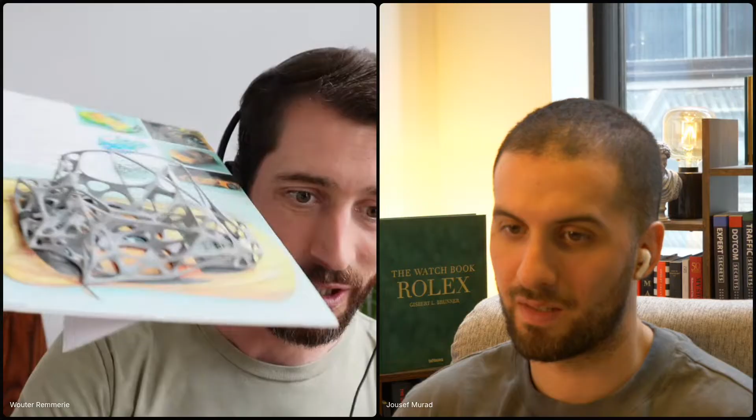And then I played around with some manual design of a framework that I would then 3D print for the chassis. And I didn't know how to run aerodynamic simulations, so I contacted a design agency here in Belgium where I live, and I asked them, "Can you run a simulation for me?" They said, "Yeah, we can, but that will cost you 3,000 euros for one single simulation, which is a market conform rate, but it's a lot, especially for a hobby." So I said, "No, thanks."

But then I quit my job, went traveling for a few months, and when I came back, I actually needed a job, and I just applied at that engineering agency that made me the offer. And then we started working on this concept, and I also started working on customer projects, which was really cool. Did that for 6 years, CFD simulations, wind tunnel testing, NASCAR, IndyCar, drones, and so on. After I had done 5 years before on structural simulations.

And then after 11 years of doing simulations, I thought, well, this is actually prohibitively expensive and difficult for customers to get into this. So instead of using the traditional approach, which is to use a license, which is 50 to 100,000 euros, expensive hardware, an expensive person to operate the software, we wanted to flip things around with AirShaper and just say, well, just pay per simulation or pay for a number of simulations without the investment in knowledge, hardware, software, and so on. And that's how AirShaper came to be.

Yeah, that's super exciting. Wouter, I think if you want, you can show us a little bit about the topic of shape morphing and shape optimization, and then we can delve straight into the software, I'd say. Yeah, happy to. I'll share my screen here. Just a sec. Share screen. Can you see my screen? Yes. Okay, fantastic.

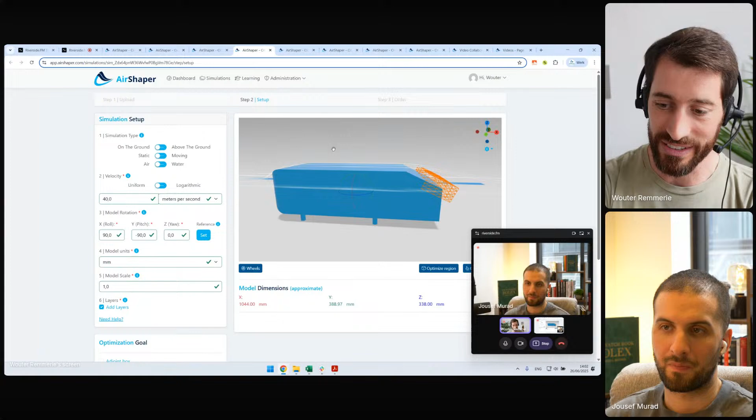So I can't show too many details on real customer projects, but this is a generic example. People in the automotive industry probably recognize this shape. This is what they call the Ahmed body, which is a very, very simple car model which they once devised to run benchmark wind tunnel tests and simulations to just check how well CFD results correlate with wind tunnel test data and so on.

And then we actually made it super accessible to run what they call adjoint shape optimization. Now, that's a very technical term. Basically, what it does is after running a normal aerodynamic simulation, the software will run a second simulation, which is called a dual or an adjoint simulation, which somehow is an inverse calculation which links your target function, your goal function, which in this case is to reduce drag, to the geometry that you have.

So for every single point on the surface, it's as if you would just move that point outward or inward, a small dent or a small bump on the surface, rerun the entire simulation, and then check did my drag go up or down. And then you do this for every point on the surface, and then you get what they call a sensitivity map, which is a color-coded map that indicates how should I morph the shape.

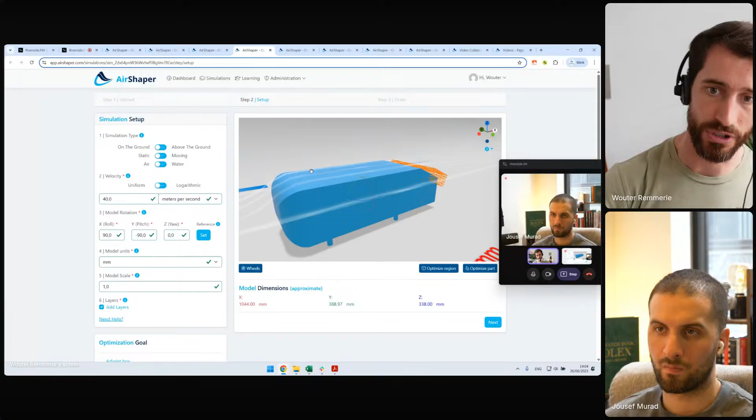But then we go one step further, and we actually have our software implement this advice. So it starts to morph it, checks it again, morphs it again, checks it again, goes through a number of cycles, and then actually ends up with an improved shape.

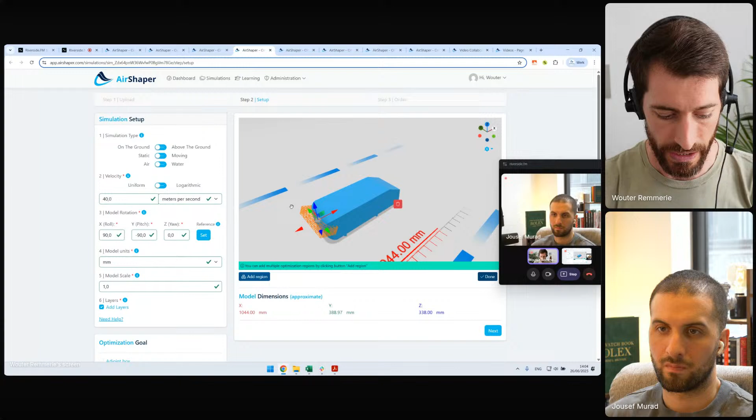And the cool thing is that in terms of regions, you can just move this region around. The goal is that you position this on a critical area. For example, if you say, I have a car and I want to optimize the headlights, then you would just bring this area forward. You can rotate this, position it, scale it however you want to put it around the area that you want to optimize. You can do multiple areas at the same time. And once this is finished, you'll get the result for the optimization.

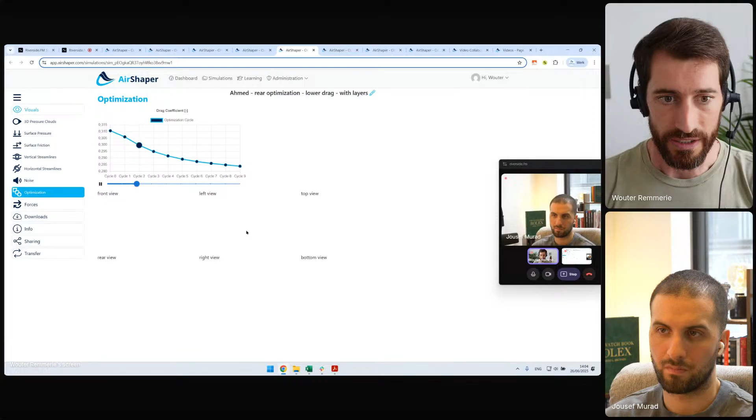So if I load the videos here, it's quite heavy, so we post-process this into videos. We optimize the rear of this Ahmed body. And at the rear, you have what they call the downward slope or the slant angle. For this Ahmed body, you have different versions there. And what the software is doing, it's automatically creating what they call a ducktail spoiler on this car, which is really interesting because that's exactly what Porsche has on their 911.

Only in this case, we didn't tell the software what a spoiler is. It doesn't know what a spoiler is. It's just mathematically looking at a better solution to reduce drag, and it just comes up with this shape. And so technically, what it's doing is it's creating a bit of back pressure here, which then translates in a reduced under pressure on the slant angle, which reduces the drag effect that you have on the back of this Ahmed body, this very simplified car.

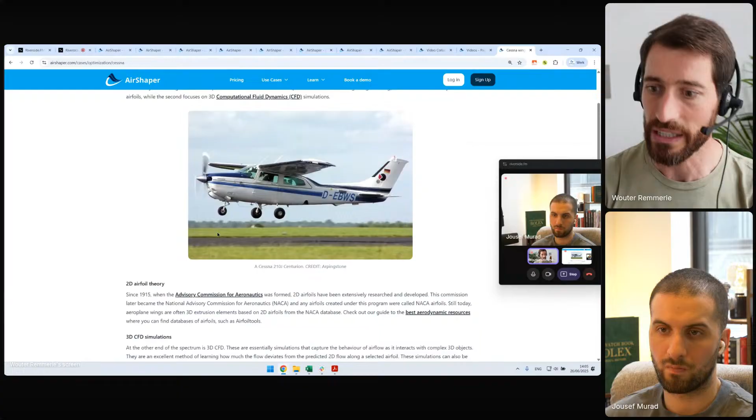And we've applied this to many cases. If you go to our list of sample cases, you also see that we applied this to winglets, which are a very critical part of the wing, which is the end of the wing. For example, there you can see that if you apply an optimization, it just comes up with these very natural, organic looking shapes, which in some cases actually mimic what you see on real cars, or in this case, what you see on real birds, like what you would see at the end of a real wing. In this case, this increased the lift by over 50%. So that's really powerful.

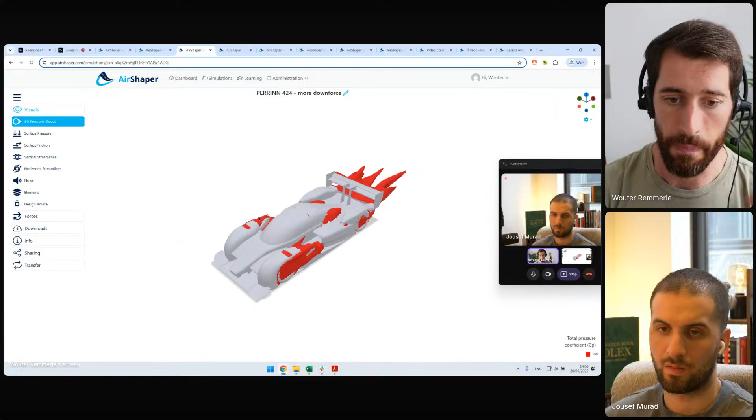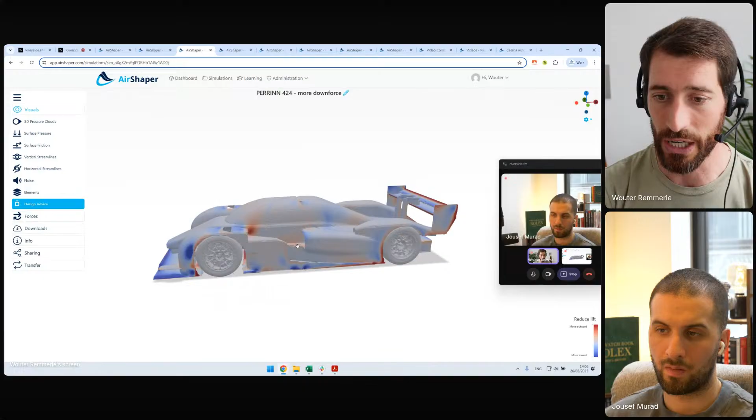And we also have, I'm going to scroll through some projects here, a version of this where we analyze a car and then we can just ask for this advice function without actually having to go through the morphing. So we can offer it at a lower rate, and then we just get this color map. So the colors that you see here on the surface are just a hint for the designer. In this case, if you want to improve downforce, then you should move the surface inward where it's blue, and move it outward where it's red. And this sometimes yields very interesting results.

For example, on this rear wing of the car, if you want more downforce, it's telling us to increase the height of this lip here at the end of the wing. This is the trailing edge of the second element of the rear wing, which is quite cool because in reality, what people do is they add a small vertical flap there, which is what they call a gurney, which is really cool because the software is now telling us make a gurney, and it doesn't know what a gurney is. But there's also more complex suggestions.

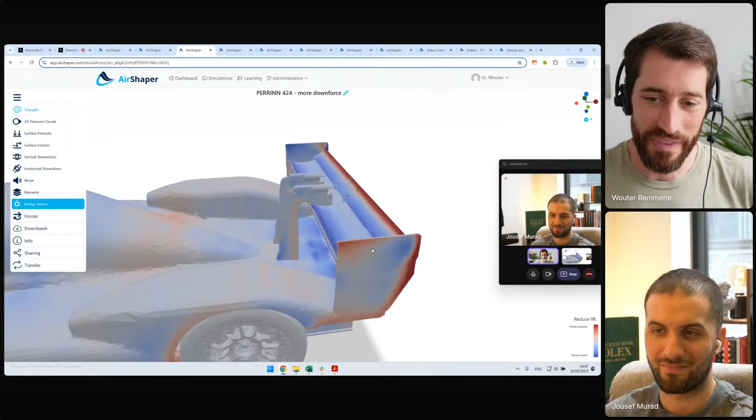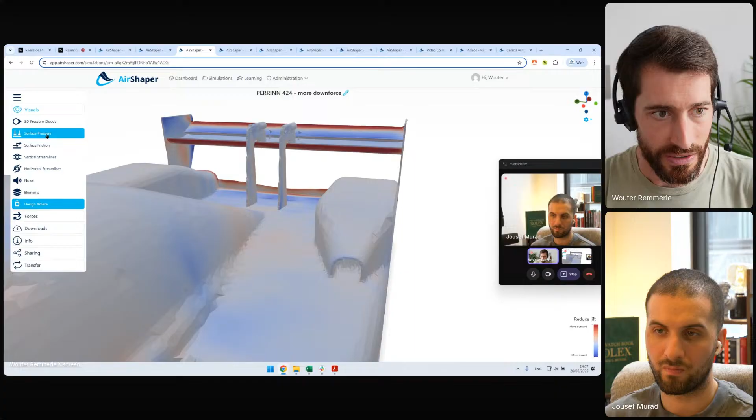For example, this is the side plate of the rear wing. And the side plate actually prevents the high pressure air at the top of the wing from short circuiting and going to the low pressure at the bottom here. That's typically your wingtip vortex. So you want to avoid that shortcut. That's why you simply put a plate there and block it.

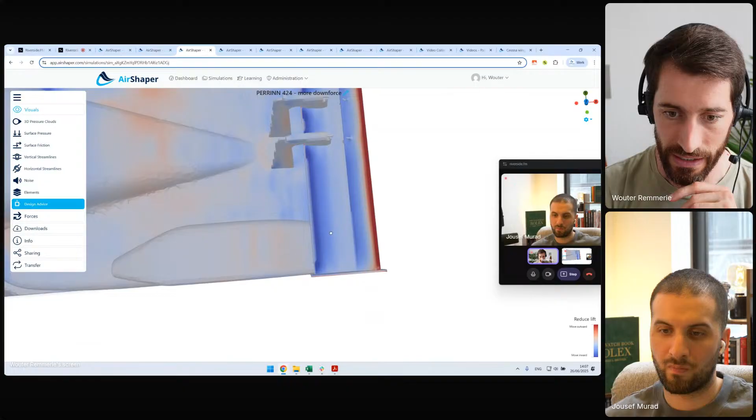So what the design advice is telling us: this is now a flat plate, but you might as well take the outer edge here and push that outward a little, which means the air flowing alongside the side will be kicked outward, which creates a low pressure at the rear.

And this low pressure then acts on the back side of the wing, creating extra downforce. So it's like doing a change in the horizontal plane to make it more effective in the vertical plane further away. So really cool how you can actually use mathematics to optimize designs.

It's pretty cool. One hint, Wouter, can you maybe close that little window on the right side? You can just click on the X, I believe. Then people can see the full beauty of AirShaper, the UI. Yes. Perfect. Okay, great. Excellent.

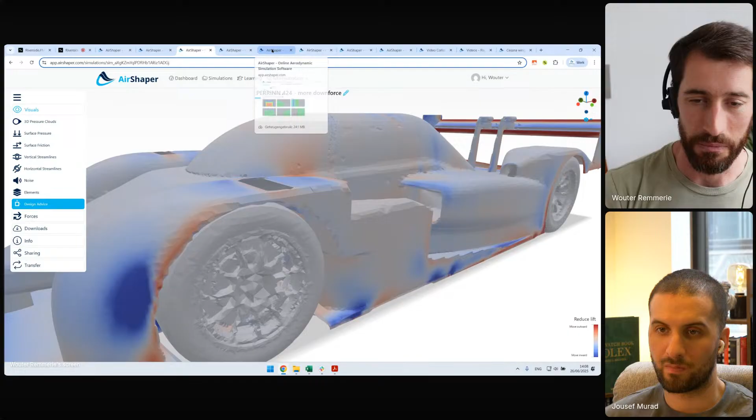So that's in a nutshell what we do with the automated optimizations. Now, if you want to look at other cool applications like hypercars, for example, we got the OK to show this one. So this is a custom Lamborghini that we did. And if you want to see this one, just head over to our video page and you'll see it. I think it's page number 5 already by now.

So this one has been built for real. I'll just turn off the volume, but this one has been built in real life. It's been built, it's been tested, and it's actually been taken to the proving grounds. And they were aiming for 420 kilometers per hour, and they already hit 447.8 kilometers per hour on the first test, and we're still aiming to go faster.

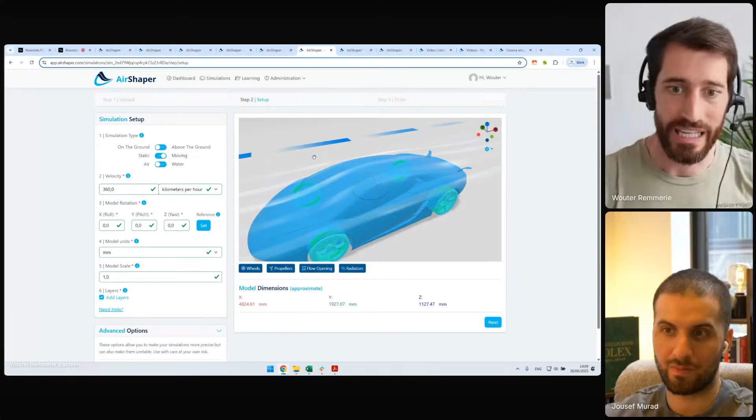Now, the way we did this was to upload this car. I've got too many tabs open. Let me just go back to the right one. We just uploaded a 3D model of the car, which was a modified Lamborghini. They took a 3D scan of the base car to get the hard points right, but then they kicked out all of the body panels, the underfloor, everything was completely redone except for the windscreen and the A pillar and the side windows. All of the other body panels, if I'm not mistaken, were done from scratch.

And through numerous iterations, and also that morphing that we discussed, the designer was able to do this with AirShaper, to cut the drag compared to the base Lamborghini by 28%. And that's crucial because if you're going for a top speed record, at those speeds, the energy that your engine is providing, let's say 80 to 90% is spent on pushing the air away. So if you can lower your drag by 28%, that gives you enough room to actually go faster again.

And the designer was working with these models. So it's a complex combination of a 3D scan of a car. And that's really not the easiest model to get right in CFD simulations, because usually in most softwares, you have to close all the gaps and the holes in 3D files before you can even run a CFD simulation. We can just work directly with those. He combined a 3D scan with custom wheels he designed with surfacing elements, which are not even solids, which he then used to visualize the body and the styling that he had in mind.

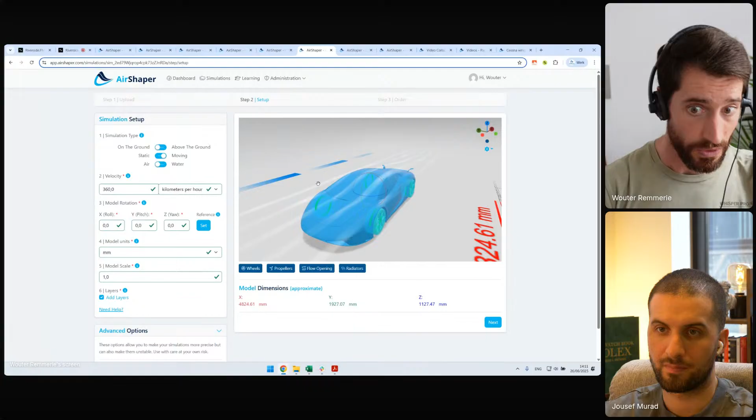He uploaded it to AirShaper and just went through the basic setup procedure, which is to say, well, it's moving, which means the ground will virtually be moving. He set the velocity. We even went to custom compressible simulations of 500 kilometers per hour. He set the angle of attack, the units, and then he added wheels to the simulation. Now, normally you have to spend lots of time finding the axis of the wheel, defining the radius, selecting all of the elements which are part of one wheel assembly, and so on.

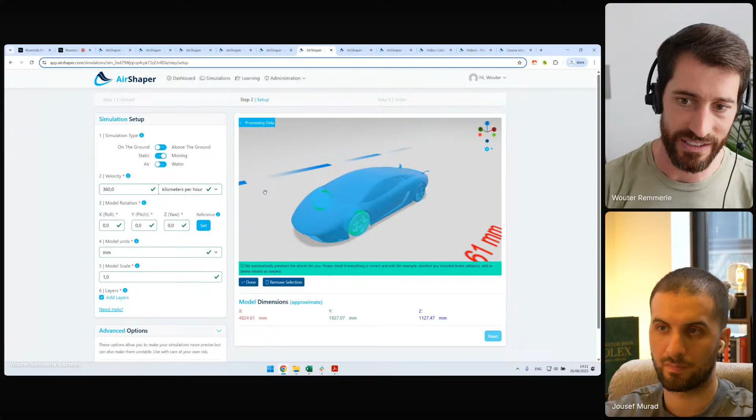He just used our automated selection. So I just click one button and our software detects the wheels. So you don't have to do anything yourself. We detect the axis of rotation. We detect the radius, which means we can calculate the RPM based on the speed of the vehicle and so on. And behind the scenes, mathematically, we translate this into boundary conditions which mimic the rotation of the wheel. And that's it. And then afterwards, he got the results in his mailbox.

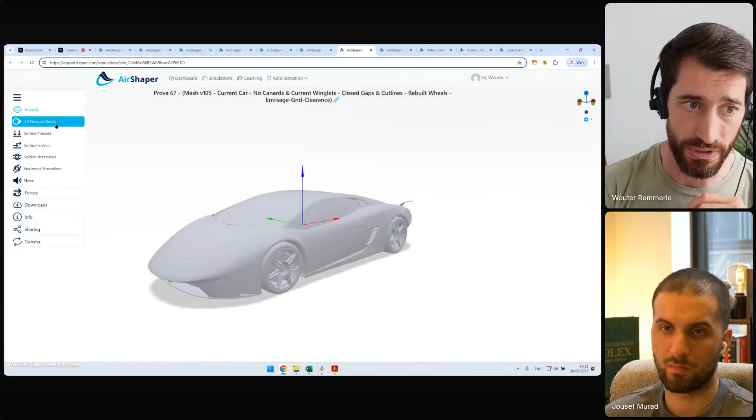So if you look at this, this is what we call the pressure clouds. This is an indication as to where you're losing energy.

So typically you'll see that on this car you don't have too many areas left actually where you're losing energy, but you'll see that on the A pillar you still have quite a strong vortex. That's one of the parts that we weren't able to modify because that was the donor car. But other than that, almost everything was cleaned up.

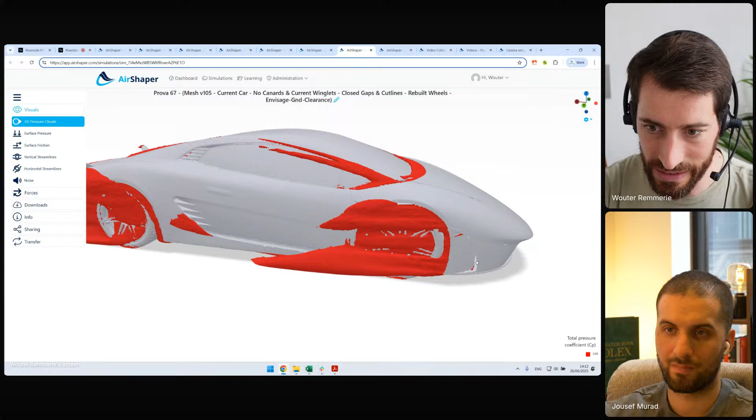So if you look at the inside here, we have massive air curtains here. So you have airflow going to the inside, which is then being spat out on the sides, which helps to create a curtain across the wheels to lower the drag. We've got wheel arch ventilations here, so the high pressure air, which is building up in the wheel well, can evacuate via this slot here instead of being pushed outward where it disturbs the free airstream.

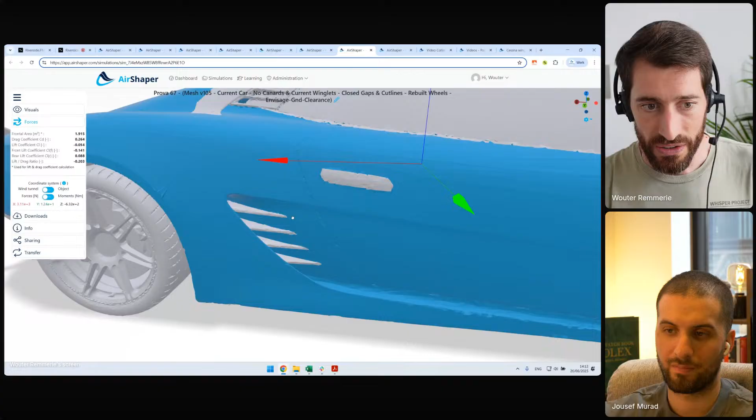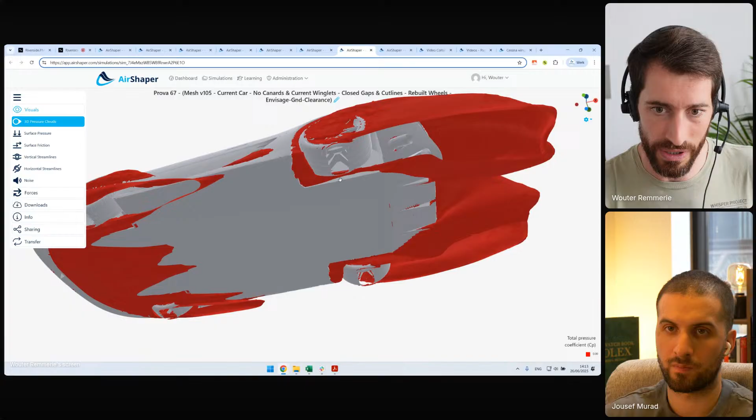We've got the inlets for the coolers here. We've got ventilation of the rear wheel arches, and then we spent so much time optimizing the diffuser. This was a really interesting area because we needed to tweak the spillover of the tires and make sure it didn't pollute the diffuser. This is actually not the final version. In the final version, we worked with a vertical wall here to further shield the wake of the wheel from the diffuser. And we optimized the front splitter quite dramatically.

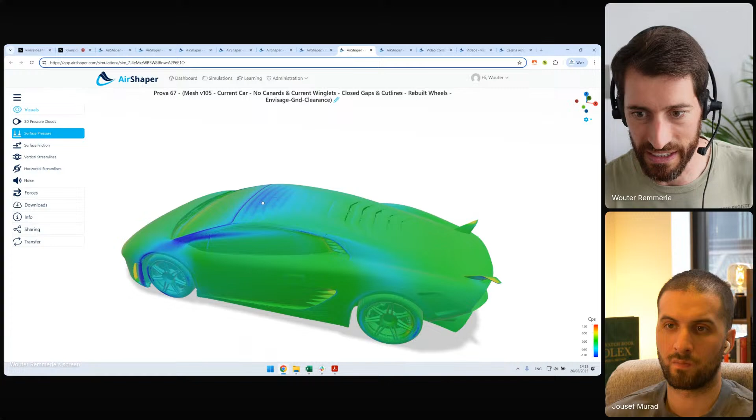This is like an air dam, which is still present on the original car, which was later also removed on this car. And then we analyzed the pressure just to see how strong this vortex is affecting the airflow. We looked at the low pressure here to generate downforce at the front, at the rear.

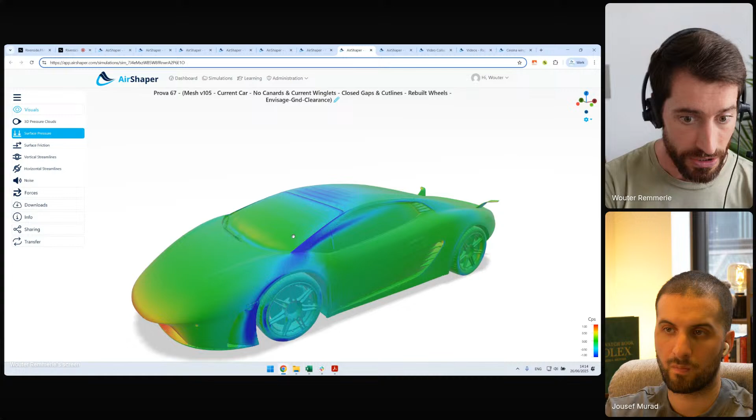And the cool thing about this project is that we weren't necessarily looking for too much downforce, because your aerodynamic forces, they scale with the square of your velocity, which means that if you go from 200 kilometers per hour to 400 or even 440, they go up by a factor 4 and more. So this would actually completely squash the car against the ground. So we were looking for a moderate amount of downforce at 400 kilometers per hour. But what we were mainly interested in is to get a good aero balance.

So we automatically calculate the front and the rear downforce. And in this earlier version of the car, we saw that we didn't have enough downforce at the rear. That's why I'm showing you this one, which is why we then applied morphing to these small wings that we had to increase the downforce at the rear. We could tweak the diffuser as well, and so on, to restore that aero balance, so you have a mild amount of downforce at both the front and the rear of the car. Any questions?

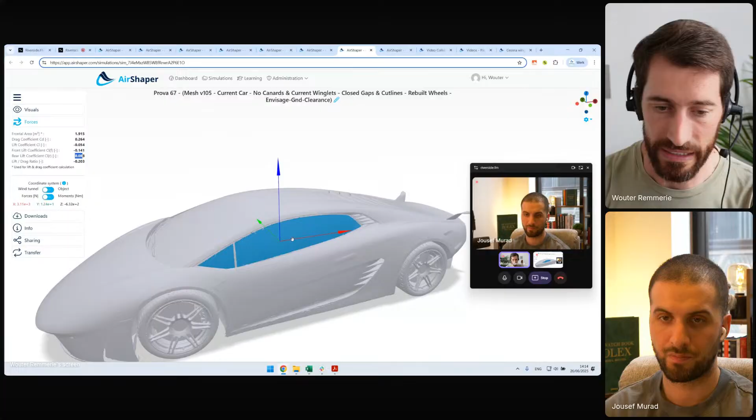No, I think that makes sense. The question is, how do you balance the downforce and basically the aerodynamic resistance, the drag? How do you balance that? Yeah, so the main goal was to reduce the drag. If you don't reduce the drag, you're never able to achieve that top speed. Of course, you can compensate for this by adding more horsepower, but this one already has 1,900 horsepower, so there's a limit to what you can do without just burning up the car. So you can add more power, but there's limits to that. So reducing the drag is super important.

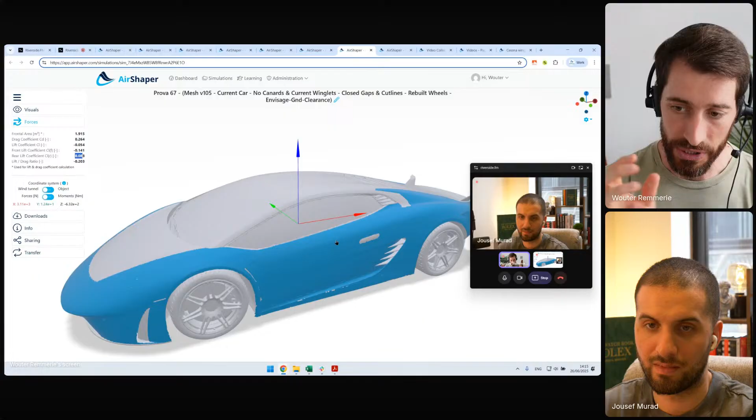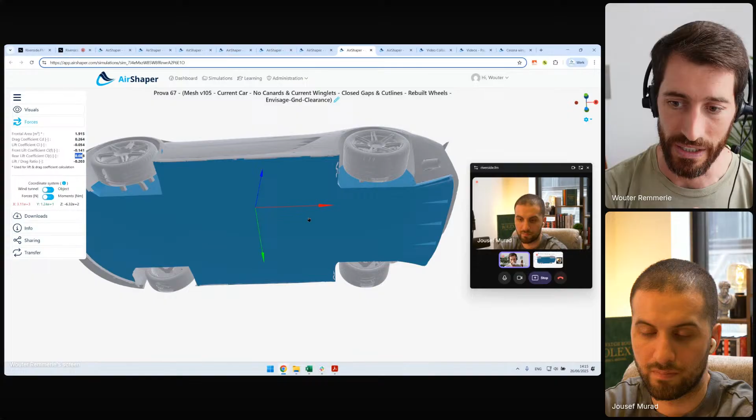Now, sometimes these go hand in hand. If you want to reduce the drag by cleaning up the underfloor and making it like one smooth surface, you also increase the speed and the attachment of the flow and the performance of the diffuser, which means you can also get more downforce. So sometimes you're lucky, and whatever you do for drag reduction still works for downforce generation, which was the case on this car. But then you have to tweak it with dive planes and wings to actually balance it out.

Yeah. The question for the rear lift coefficient, how did you find the balance? Like, how do you decide on a perfect, quote unquote, number that's acceptable? Yeah, so it depends. So for some projects, we do car design from scratch. And then you would have a specification or a goal set by your customer. Like we want 200 kilograms of downforce at a certain velocity. Okay, then you can just aim for it. In other cases, like in this one, but in other projects as well, we also work for Bertone, which is quite nice. It's also based on a Lamborghini. And there you want to design a very unique car.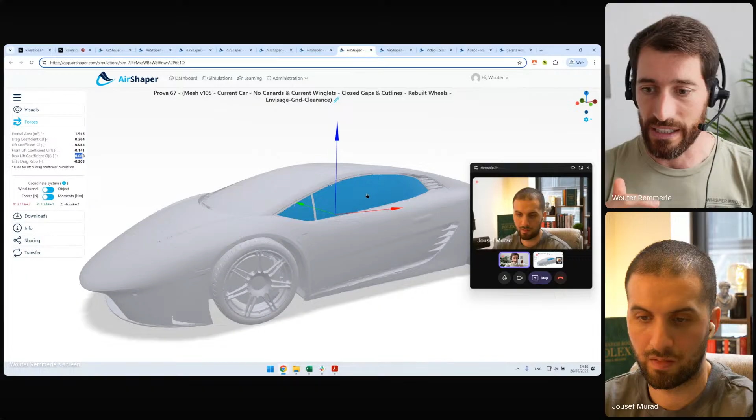If you just go to Bertone, to their website, this is a really nice car, the 110 that they designed. So what you want to do there is to make sure that you don't make the aerodynamics worse. So in that case, what you can do, you can take the donor car, make a very precise 3D scan of the car, run the analysis on that car, and use that as a benchmark, and then say we want at least what this car has, and then you can take that as a reference, and then you can start

to tweak it. If you say, well, but I want more top speed, okay, then let's focus on drag reduction. If you say, no, this one has to be track oriented, then let's focus on a bit more downforce and sacrifice some of the top speed. Those are the typical references that we use. Makes sense.

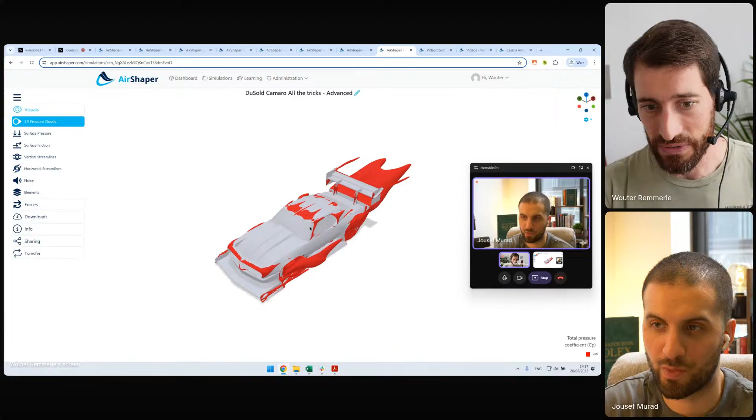Maybe another cool example if you want. Yeah. Make sure to close the mini window. Oh, sorry. Make sure to close the mini window again. Yeah. Yes, super annoying, I know. It popped up again. Okay, my apologies.

Yeah, I think no questions so far about that. Go ahead. Okay, great. Yeah, we had a really fun one over the weekend, and also new for you, Jousef, because this is brand new. So Pikes Peak happened this weekend, and Pikes Peak is, I don't know if you know it, but quite a lot of race enthusiasts go there to see cars race up the hill. It's a hill climb competition, and the person who won it 4 times already is Robin Shute.

And this year he was racing a modified Chevrolet Camaro of 1976. And you would say, well, that's pretty bad in terms of aerodynamics, and you'd be totally right. Now, the only thing is, they got to work heavily on the aerodynamics, and they just made a monster out of it in terms of performance. So, this is the real car. So, we got the approval to make this public, this simulation. So, after the call, if you want, you can share this link, and people can go check out this simulation.

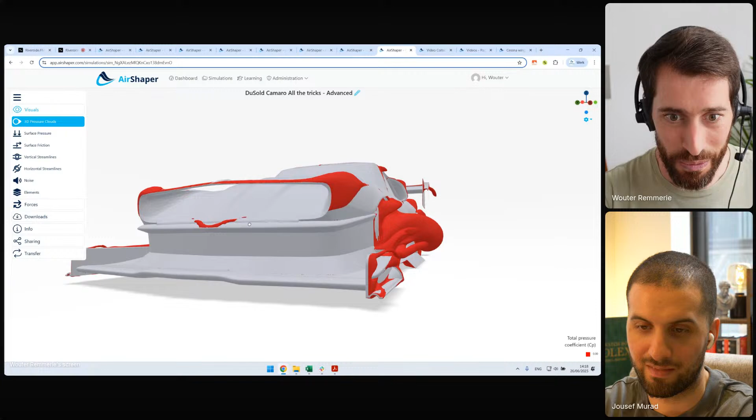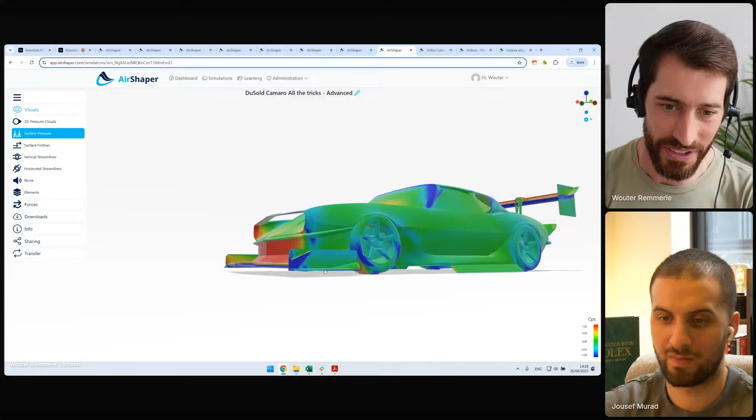You can see that the nose of the car, they actually completely chopped it up, made it open, and so virtually, this is a nice curve of the front hood. Visually, it still looks like a Camaro because they have this bridge here. They added a massive front wing, and that wing is in ground effect. So that means it's very close to the ground. So the air speeds up at the bottom and just creates a tremendous amount of downforce at the front, really pushing the front wheels onto the ground.

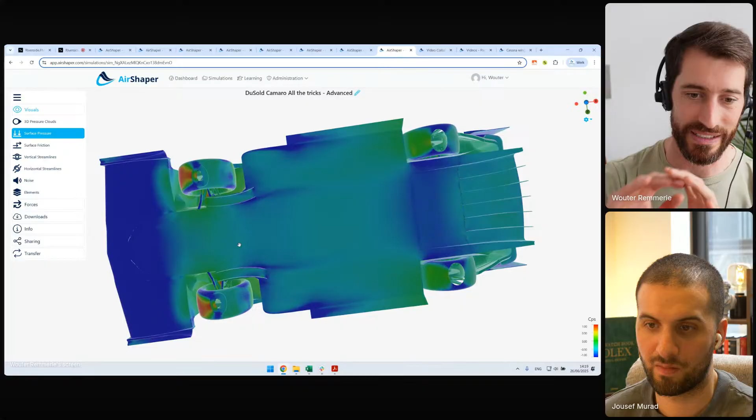They added side skirts, kind of like the McMurtry, to avoid or to create that extra low pressure area without airflow leaking in and reducing that low pressure effect. And then they added a massive diffuser. So you can see all of these blue areas. That means there's a tremendous amount of downforce, which they then even augmented by adding vortex generators, which means the flow passes alongside them, trips, which creates high speed vortices. And then these vortices that you see, they also create extra downforce.

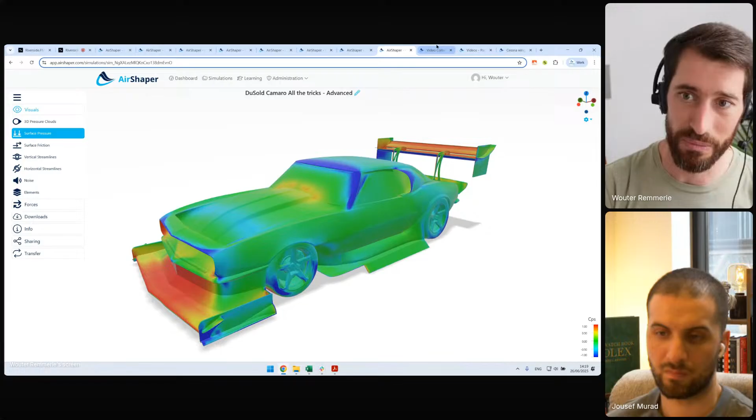And this car in total has a lift to drag ratio, which is how much lift do you get for the same amount of drag on your car, of almost 4. That means for every Newton or kilogram, if you want to call it that way, of air resistance going forward, you have 4 kilograms of vertical downward push on this car, which is insane. And then combined with, in this case, 1400 horsepower, this results in a pretty cool car. So this one with the AirShaper stuff on it just raced over the weekend. It was really cool to see how it performed.

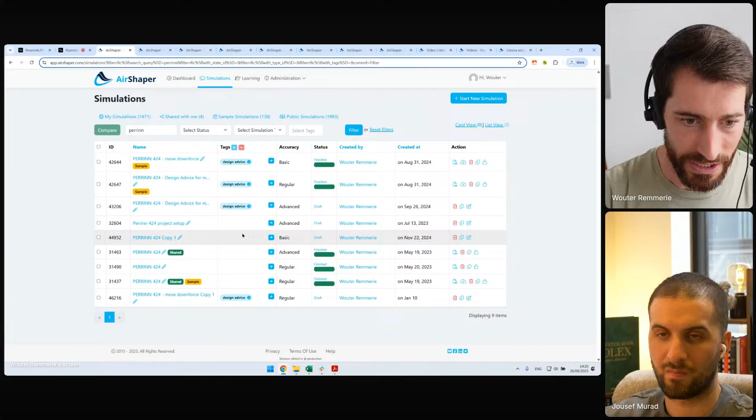Other examples, I opened up this one. Let me just go back here and select this. We have another example where we actually show how you can set up radiators. So radiators are quite important for cooling, but they also affect the aerodynamic drag. So we have the option to add radiators to the simulation, which means you can just provide their pressure drop data, which means how much pressure buildup do you get in function of the airflow or the airspeed through the radiators, which means afterwards you can just click on the radiators and you can analyze the flow rate through them.

So this is another public example. This is an open source race car project, the PERRINN 424.

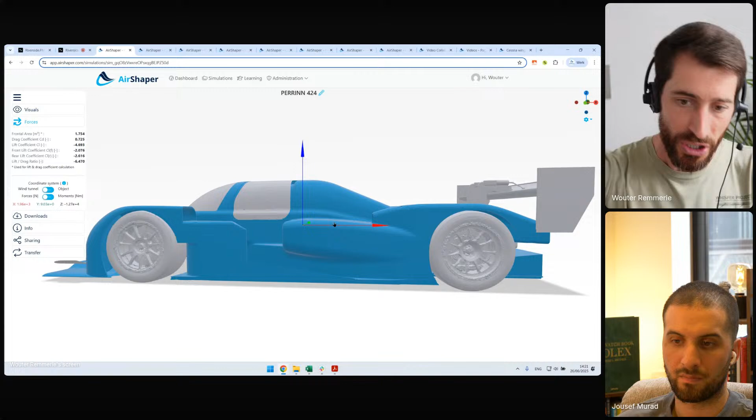And the way it's set up is that the airflow enters the side pods here, and then it enters this chamber, let's say, and the radiators are positioned at an angle. Of course, you couldn't put them vertically because that would take up too much space. So they're at an angle, and that means the air gets trapped at the end of that chamber where the bottom of the chamber and the end of the radiator meet.

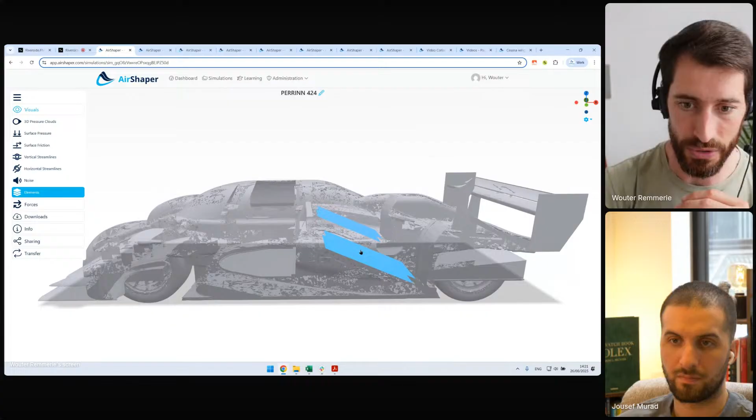And that's why most of the airflow is being forced through the end of the radiator, which is why you see all of this airflow going through the bottom part, and the top part is really not being used as much as the bottom part. So if you have enough cooling capacity already, that means you can either make do with a smaller radiator and save some weight, lower your body panels, reduce the drag, and so on.

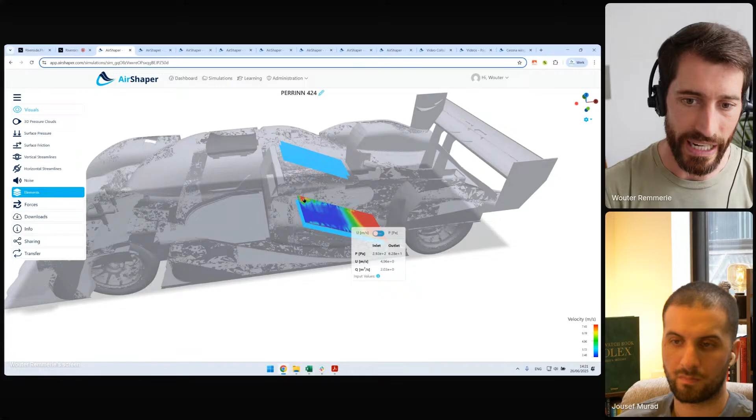Or if you're struggling with your cooling, that means we can help you optimize the flow towards the radiator, change the ducting, maybe add some baffles to force some air through the top part of the radiator, and so on. So that's really an interesting part as well. And when it comes to downforce and drag reduction, it's really interesting to just analyze individual elements.

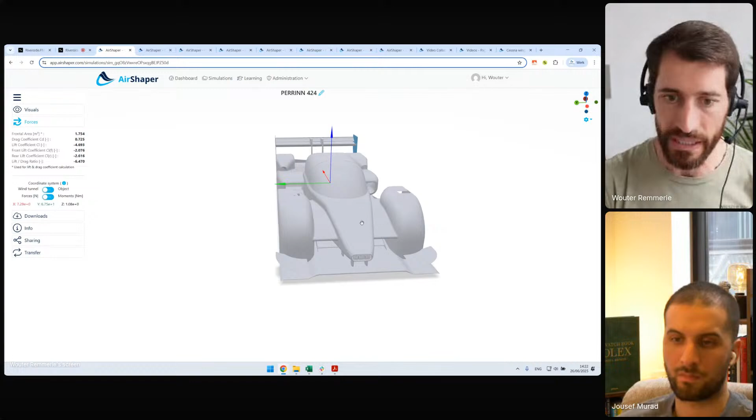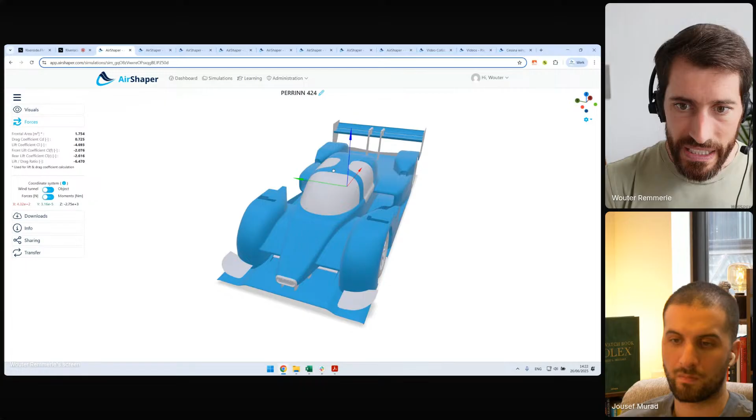So we will automatically copy the component structure of your file, and that means you can afterwards just click on individual components. If you want to know what the downforce is on a dive plane, for example, you can just click on the dive plane and you can analyze the forces on that component without having to set up the meshing yourself. The meshing, the adaptive mesh refinement during the simulation, it's all done in an automated way. So the only thing you have to do is interpret results and improve your design.

And you mentioned the Porsche Taycan at the beginning of the video. So if I go to our videos page, the Porsche Taycan, we did a number of things. We did an explainer video, which showcases how this optimization method works. So if you want to see the details, it's for the geeks out there, which includes me, by the way. If you want to see a more tangible result, you can actually look at the Aptera that we did.

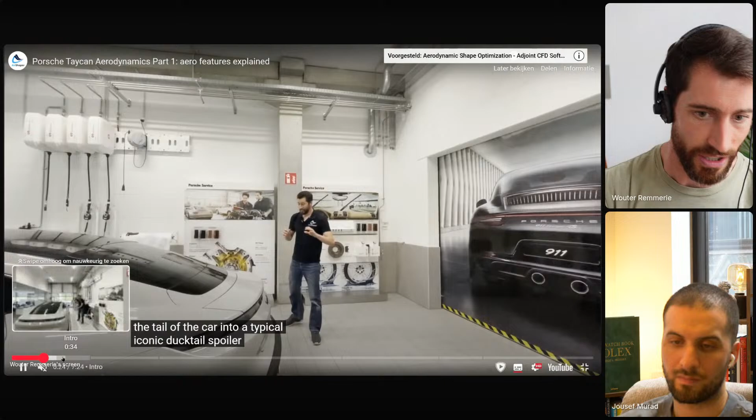But before I go there, the Porsche Taycan has a really nice set of aero features to reduce the drag. Because it's an electric vehicle, you want to increase the range without having to boost the battery capacity because that's very expensive. So on this car, you can see a number of things. We instrumented this with tufts to test it afterwards. But if you look at this car, at the bottom, you can see it's all very flat. It's very smooth.

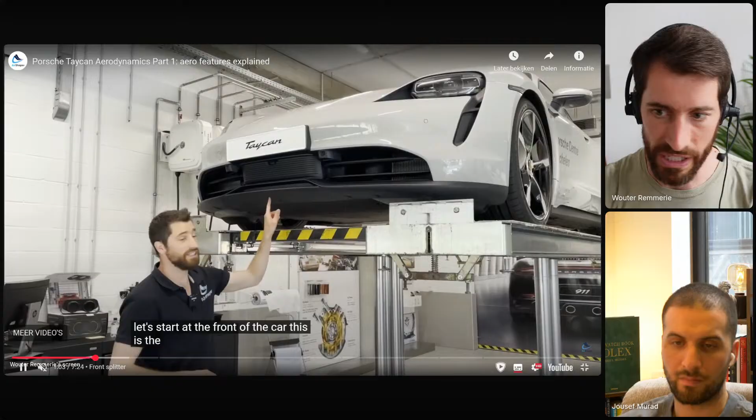So there's a nice upward curve on the front splitter to really guide the air underneath the car. There are air deflectors in front of the wheels there to make sure the air doesn't hit the wheels full on at the front. You can see that the underfloor of the car is really smooth and flat. So all of the bolts and the nuts, they've been made flush or actually sunk into the bodywork.

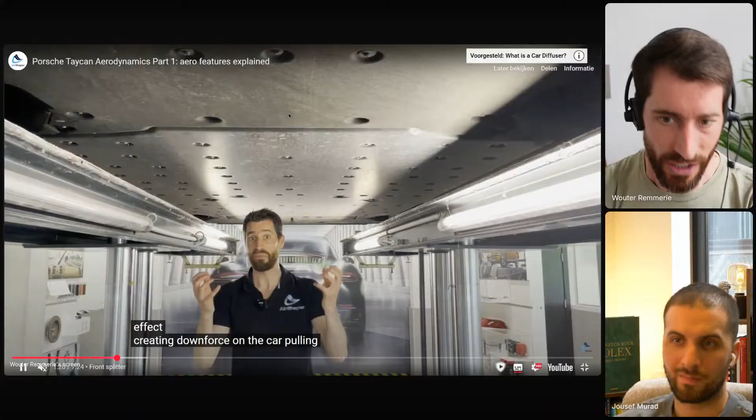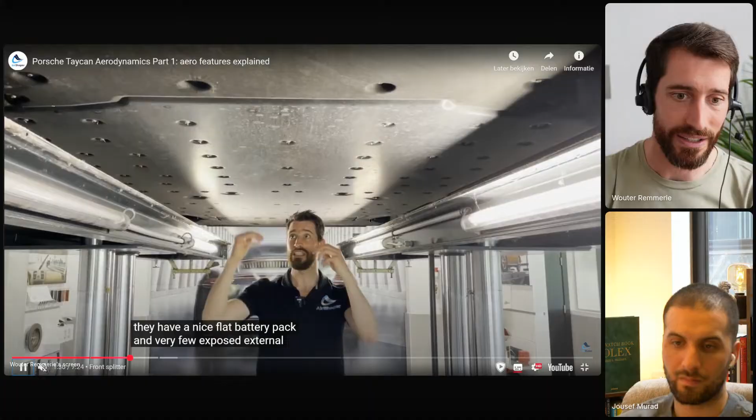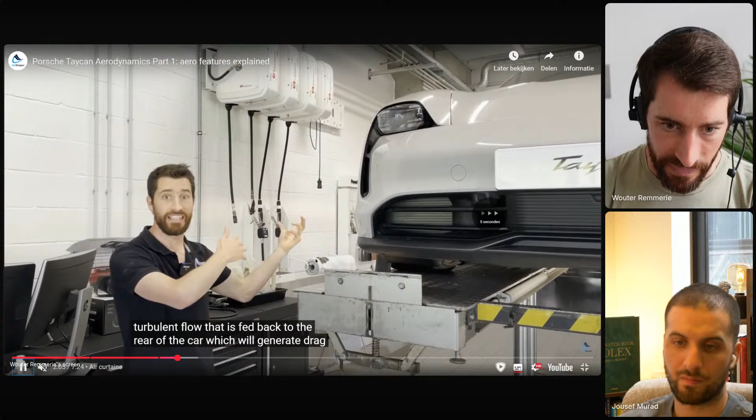And what you can see is that even the suspension, it's a bit hard to see here, but even the suspension got its own covers to guide the airflow even along the cavity that you normally have around your suspension components. So really a lot of work has been put in there. A nice diffuser at the rear. You'll see air curtains at the front. And you will see on the sides, this is the air curtain. So you can see that the air can actually flow through and then gets ejected alongside the wheels there.

The wheels themselves are almost like a turbine, really soft shapes to not mix the air too much. And so a tremendous amount of information and things to be learned from this car. And then we took it out for a spin. Luckily, Porsche said, yes, here are the keys, go for it.

So we instrumented the car with a lot of tufts, which allowed us to actually correlate our CFD simulations with what we see in real life. So you see here that you have a big separation area because of the outwash of the wheel wake, let's say. And we could also see this in real life, which is evidenced by these small tufts moving up and down. So in a bit, you'll see them moving.

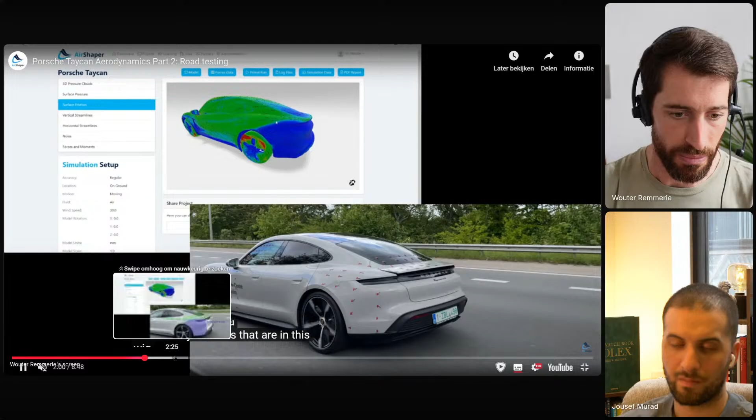So you see that these ones, they're all moving nervously because they're in the turbulent wake here. And the ones at the top here, which are in the green attached flow area, they stay stable. So it's really important to correlate your CFD findings to your real life results.

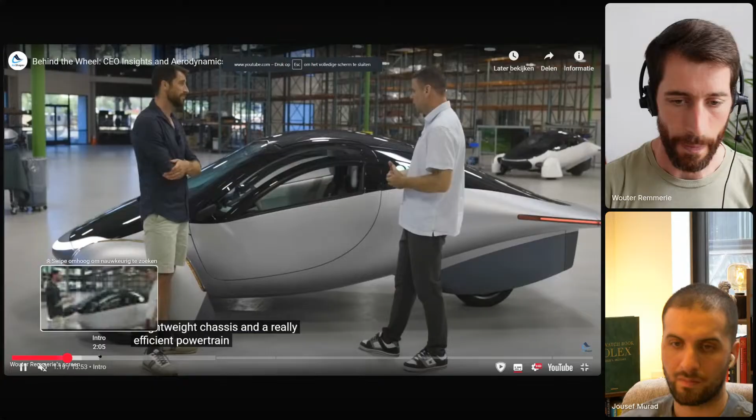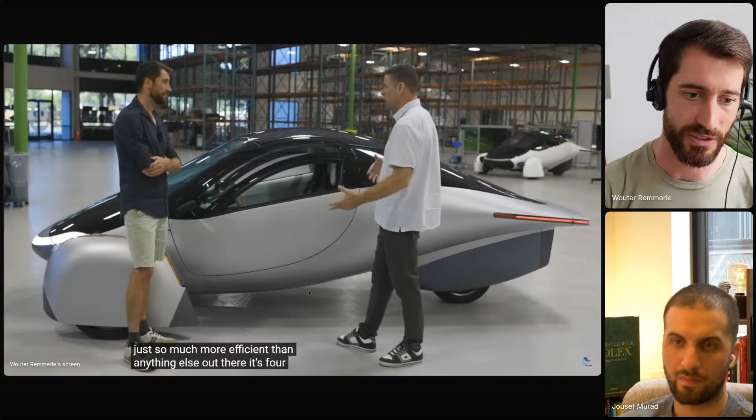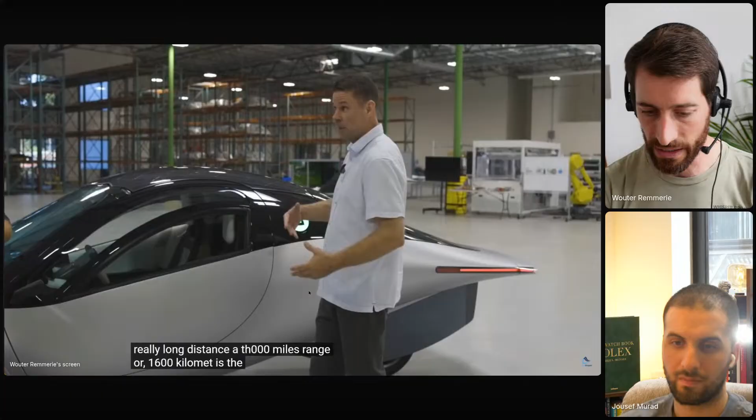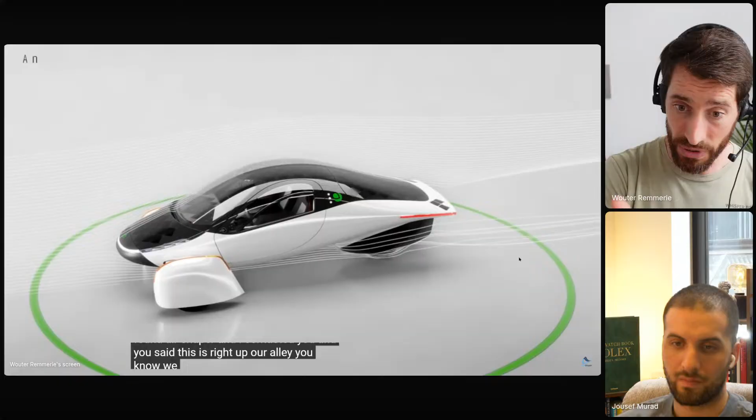These are real airflow CFD results, by the way. We rendered them in a nice way. So you can see the streamlines here. Afterwards, you'll be able to see the pressure clouds, which is where the wake is still coming from. Not a lot on this car. It's a really low drag coefficient. And then we asked the software in specific areas to optimize the shape.

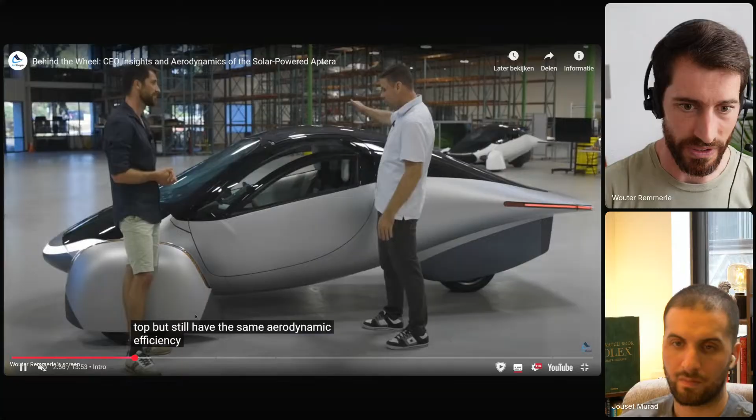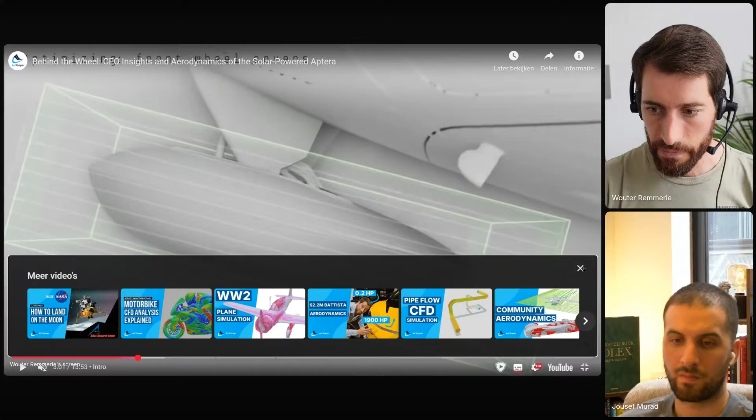So if I zoom in on this one, for example, here you're going to see that we created a design space around the front wheel cover. And then we asked the software, please reduce the drag. And then in green, you'll be able to see what the morphing magnitude was. So this is real morphing data. So the software was telling us, well, push the rear edge of this wheel cover outward and push the front edge inward. And back then we were very curious to see why this was.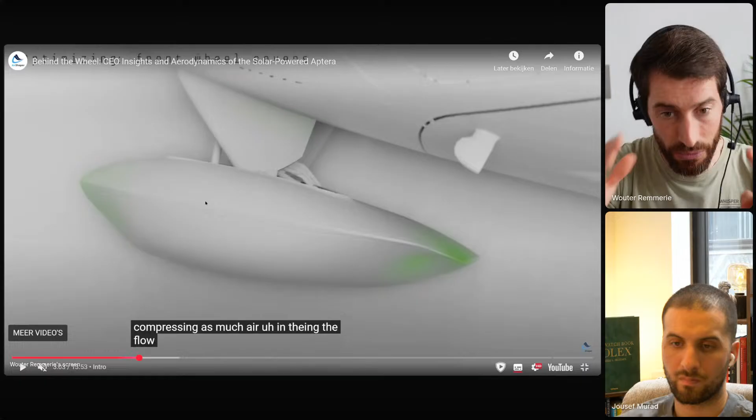And this really opened our eyes, because what the software was telling us is that the airflow around the wheels isn't coming in at a 0 degrees angle of attack. It's coming in under a side angle because the airflow is already being diverted because of the nose of the car. So the software was telling us to redesign the wheel covers to align them with the local airflow around the car, which is actually, ironically, to make them point inward a bit. And so we did this. We did this on multiple areas on the car.

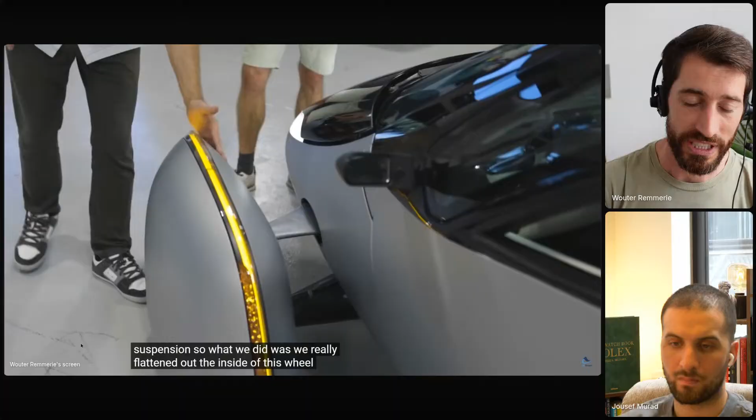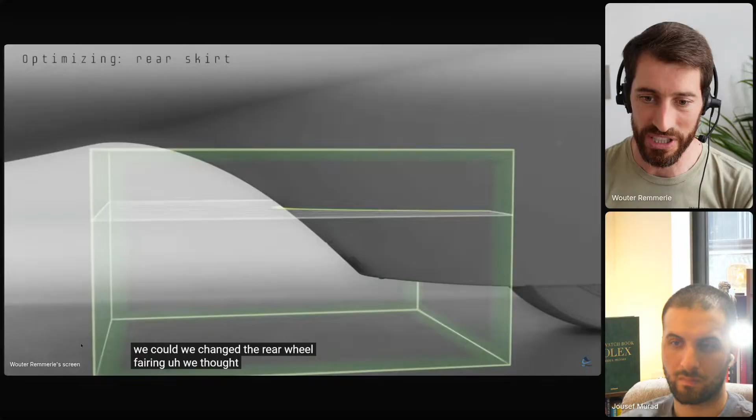And the result was that in the end, before we watered it down to match safety and other regulations, we had a 15% drag reduction on the car, which is huge. And then we had to combine it with safety constraints, aesthetics constraints, cost constraints, and so on. But they were still left with 6% drag reduction on the car, which translates into a massive increase in the range, which is already significant on this car. They're aiming for a 1,000-mile range on their top version. So all of what you see here are actual optimization results, which inspired them to redesign the car.

I've been rambling a lot, Jousef. Which other questions do you have? No, all good.

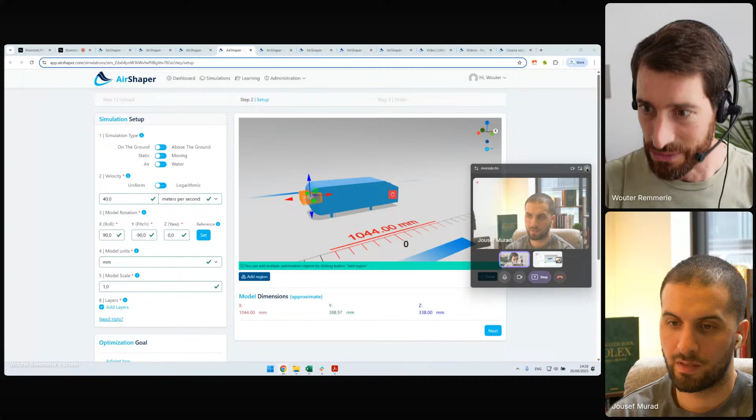I'm wondering from the simulation point of view, when you do these shape optimization studies, do you define one angle of attack from the airflow, or do you choose different parameters from different angles? You can choose. So if you have a limited scope for your aerodynamics study, and I'll close this window straight away, you would do it for just one angle of attack. It also depends on your timeline, your budget, and so on.

But yes, you can have contradictive results between a 0 degree yaw angle and a 5 or 10 degree yaw angle. That is correct. So it depends on what your focus is. Do you want to focus on top speed? In that case, because your top speed is so high, the impact of the side wind, which combines into a total vector on your car, is limited because you yourself are going very fast, and then it doesn't make too much sense to look at 5 degrees yaw angle.

But if you're looking at an EV, which will be traveling at maybe 70 miles an hour, 100, 110 kilometers per hour, then it does make sense to take this into account. Because if you don't, the risk is that you optimize fully for 0 degrees. And in that case, you can just make very, very long covers around the wheels, make a very long tail at the car, which is all great if you don't have a side wind.

But as soon as you have a side wind, those very long surfaces, which mimic the drop shape, they start to act like barriers or walls. And then that really destroys any benefits that you had.

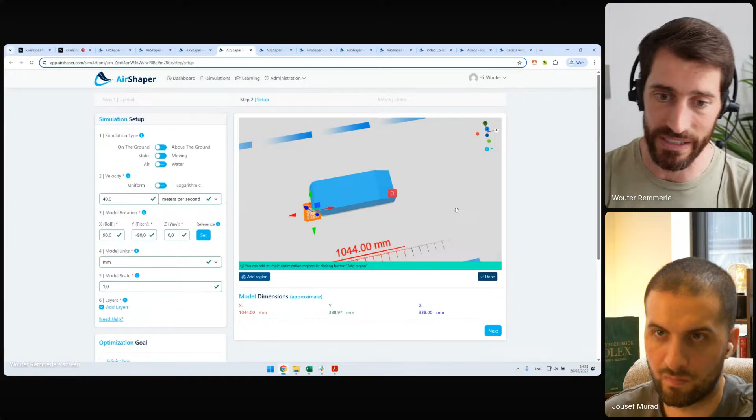Super interesting. Yeah. I have one question. How do you get started with AirShaper? Let's say you want to fiddle around with the interface, and how much does it actually cost for academics, for professionals? How do you offer it?

Good question. So there is a pricing page, obviously, and we work with credits. So you pay credits per simulation, and the cost is determined by a number of things. First of all, the accuracy level. So we have a very low resolution, which is just 1 million cells. That's 1 credit per simulation. It's what our hobbyists and students are using. And to answer your question, you can run one of these for free, one per week.

The downside is that your results will be made public, and you won't see any force data, like lift and drag are not displayed, but you'll be able to see the flow structure around your object. So if you're a student and you want to just try the platform, you can go for the low resolution one once a week.

If you want to go for a decent resolution, which is what you need for a car or for a drone, anything like that, you can go for a regular simulation, which is 10 million cells, and it also costs 10 credits per simulation. And then we have an advanced one, which is what our OEM customers are using. We've got NIO, for example, Morgan Motors, they're using our platform. So the top level one.

Now, if you want to get credits, we have three different plans. So we have a discovery plan, which is again for individuals or hobbyists or students who just want to get a bit more insights. You can buy 25 credits for 990 euros. And this one is limited to just basic simulations. So that means you can run 25 of those simulations using your discovery plan. You can also run internal flow simulations, by the way, flow through pipes, valves, and so on.

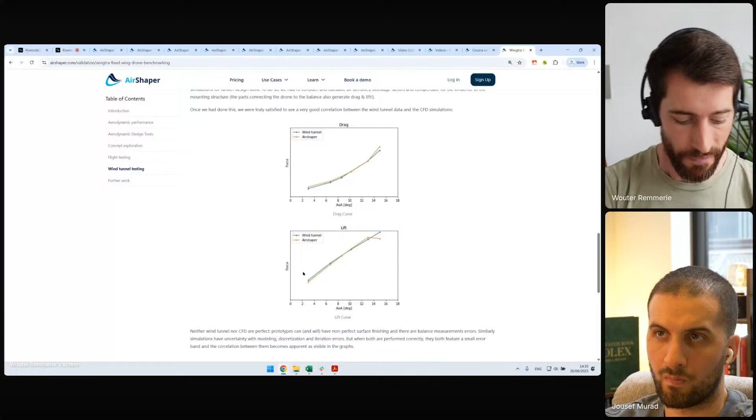But the exact same code without any modification also shows very good correlation when it comes to drone analysis. This is a drone where we analyze the lift and the drag in function of the angle of attack. And again, very good correlation. We also did propeller analysis together with one of the leading manufacturers where we got wind tunnel test data to compare this to their data.

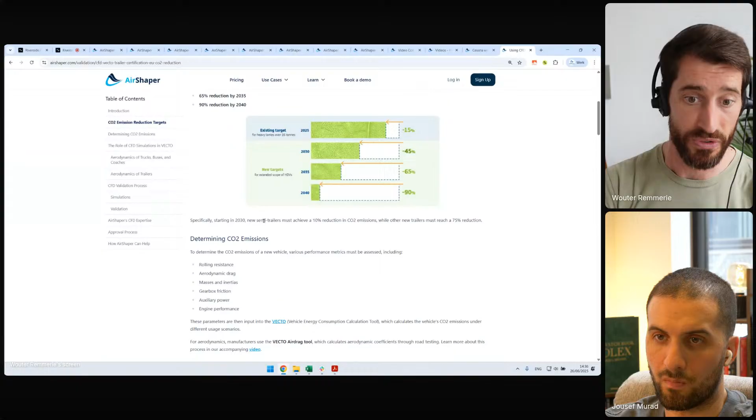We comply with European regulations, which state that if you want to use CFD to actually bring your solutions to the market to produce add-ons for trucks to reduce the drag, you first have to go through a procedure to prove that your CFD code is accurate enough, and our results are spot in the middle of the error bands that you're allowed to be within. We do internal flow validations, flow through pipes. We have a fighter jet at low speed, and so on.

Excellent. We have another follow-up question. A very informative talk so far. Thank you. How does AirShaper work to model and display surfaces with zero thickness surfaces or scan data? Does it solidify the components automatically or use backface culling? Well, that's a very interesting question.

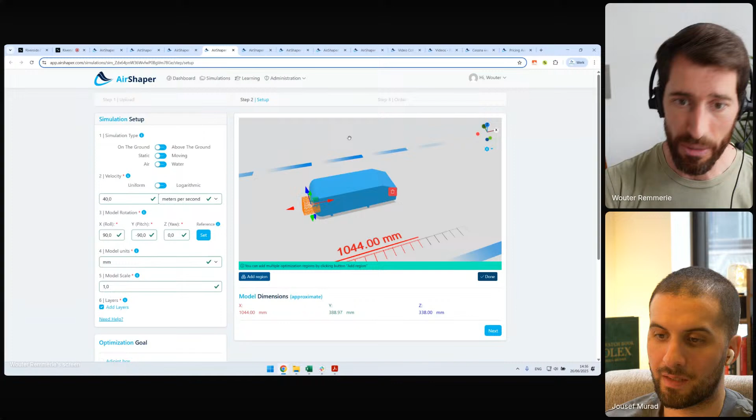So in the very early days of AirShaper, we had this interface where during the upload we would have a warning, and we would highlight the open edges and flash them and say, "Well, please fix this. This is not watertight." But then we saw that this is really, really time consuming and making it impossible for many customers to actually run their project because they don't have the skills or the time to close their model. So instead of closing the model, which you can do with a shrink wrap, for example, or solidify commands and so on, but they're prone to errors, they don't always work, and you can sometimes close gaps which aren't supposed to be closed and the other way around.

We decided to just leave the models as they are, which means that, of course, we're not talking about a missing panel. That, of course, would destroy the aerodynamics also virtually. But we're talking about a model where you have a small tolerance where the flow leaks to the inside. Normally, that crashes the simulation. In our case, it doesn't. We will have mesh flowing to the inside of the car, but that's a static pocket of air which is just traveling along with your car because there's no interaction with the outside air apart from this very small miniature gap.

Sorry, this represents a computational penalty, of course, because even though the airflow is standing still, you still need to calculate it on the inside. Now we offer fixed pricing, so of course it would be very problematic for us if we would have to calculate the mesh on the inside and spend a lot of money, and actually spend more money on the simulation than what we earn with the simulation.

But we created our own adaptive mesh refinement. We also made this open source for those who want to check it out. We adaptively refine the mesh during the simulation. So that means if you order a 10 million cell simulation at AirShaper, we'll first run it at 5 million cells, already with the mesh refined using the rules of thumb, like if you're close to sharp edges and so on.

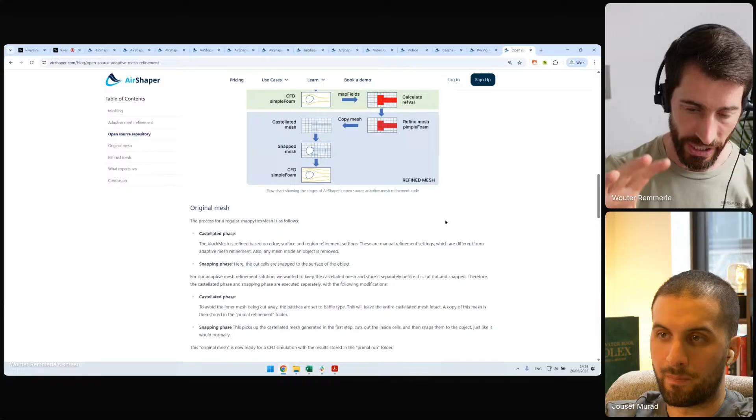We let it converge completely, and then we will automatically refine the mesh in those areas where the gradient of pressure and the vorticity and so on are high. We refine the surface, and then we continue with the results from the previous simulation. We map it onto the new simulation. We continue with the 10 million cell mesh, which is much more detailed, with a mesh which is exactly tuned to not just your geometry, but to the flow pattern around your geometry. And that's how we can actually get very precise results, even with a relatively low mesh count in some cases.

The cool thing is that because we control this adaptive mesh refinement, we also know that the inside of the car doesn't see much vorticity or pressure gradients, which means automatically our adaptive mesh refinement isn't as aggressive on the inside as it is on the outside, which means the computational penalty or the excess amount of calculations that we need to run is actually quite limited, which in turn allows us to offer fixed pricing even when a model is not watertight. Long explanation for a short question.

That makes a lot of sense. Yeah, that was a great explanation.

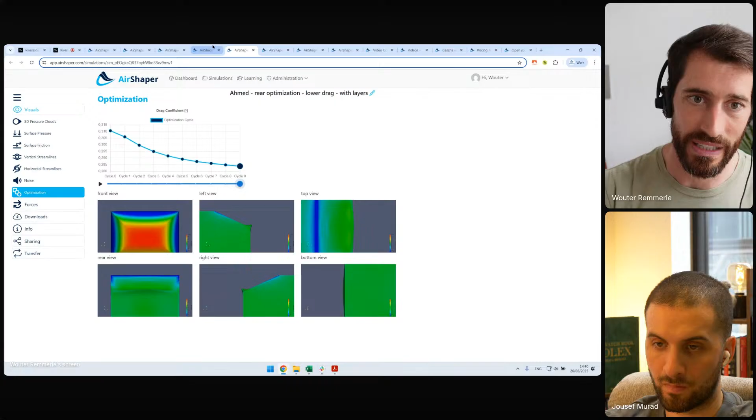Thanks, Wouter. A follow-up question from the same person: can the adjoint method be directly combined with restraints like minimum radii, or does it require manual remodeling and verification? Yeah, we don't have any constraints at the moment for our adjoint methods. So the only constraint that we can apply is the bounding box or the design space that you specify. So this one is a constraint. We will not morph outside this box, or maybe just outside this box because there's some collateral morphing, let's say. But that's the main constraint that we have.

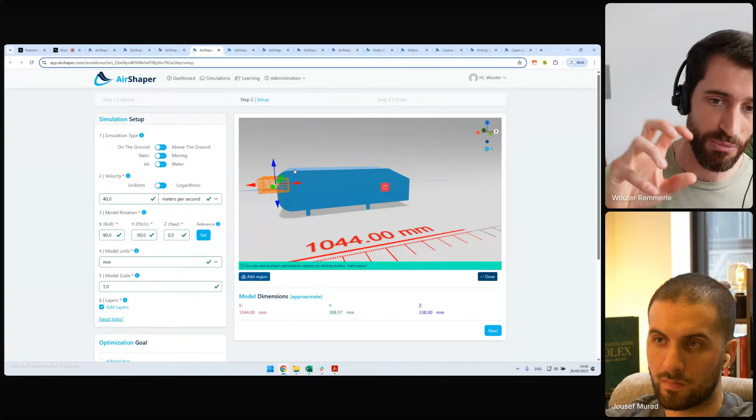So if you want, sometimes you can actually choose an intelligent combination of boxes where you would have a box here, for example, then you would keep this element unboxed, let's say, and then have a second box here to only allow morphing in the right spaces. But we don't have any minimum radius constraints at the moment.

Okay, and then last question before we wrap it up. When you do your simulations, do you have to specify the solver, or, according to the case and the initial and limit conditions, is the solver chosen directly from the OpenFOAM database without specifying it? It's always the same solver. First of all, that allows us to actually make the best possible use out of it and make it very robust. And also, you want to be able to have your results comparable between different runs. So what we would not want is that one simulation gets solver A and another simulation uses solver B, because you then cannot compare the results anymore.

So it's always the simpleFoam solver, which is the steady state RANS solver with k-omega SST as a turbulence model, including the adjoint optimizations. They're also using adjoint k-omega SST.